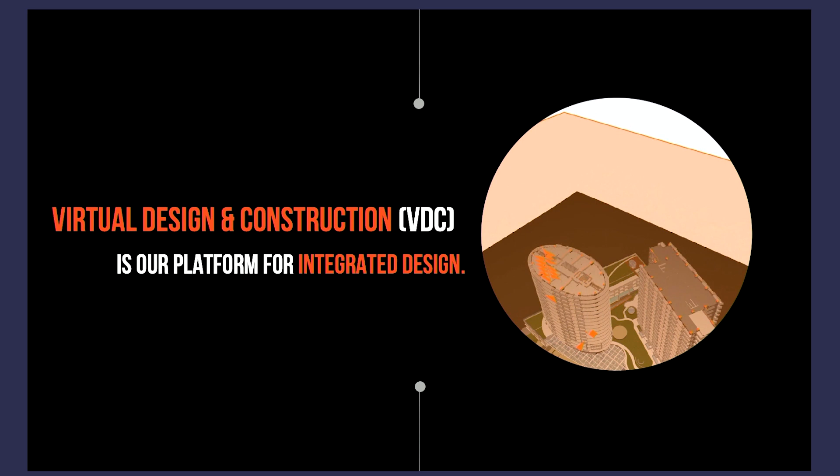And when we started the firm 25 years ago, we always saw ourselves not just as a design practice, but also as a technology provider. And that has been our ethos from the start up to now. And when we started our business, we also were big in integration. So what do we mean by integration during that time? We were looking at integrating our 4 design disciplines: architecture, interior design, master planning, and graphic design.

Now, what we also realize is integration happens with technology. So one of the things we do a lot now, since the time that we adopted BIM, is to not only integrate design, but also include technology. And VDC or BIM has been our platform. And a big part of our story is our partnership with ArchiCAD, which goes back 15 years ago when we were a small firm. We started with ArchiCAD 9.

So that was a time then there was still PlotMaker. For those who are old enough, before there was a separate software for plotting and for modeling. And eventually in 10, they merged it. So we started at that time. And our firm started in 1995. We started with less than 10 people in a small office in a place called Makati in the Philippines.

And this was a time when Asia was booming. So because of that boom, we started our practice, and we kept on winning work. The Asian crisis happened. Instead of decreasing our numbers, we continued to grow as a business. I guess clients liked the way we delivered work. So we were continuously growing from 1995 to about 2005.

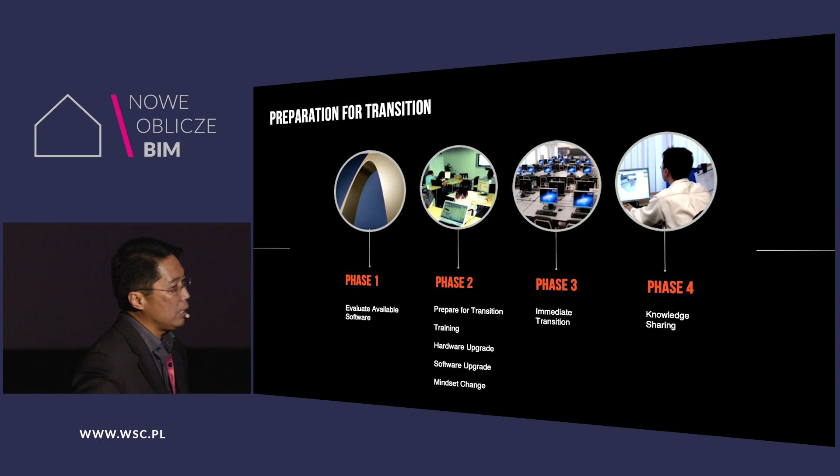Number 1, the question of BIM manager. Our BIM management system was just a copy of our structure when we were in 2D. We had one BIM manager for the whole office, and obviously that didn't work. We were transitioning, we were still in the learning curve, and we addressed that by assigning more BIM managers.

In our office, during that time, we had 4 design studios. All of those 4 have their own BIM managers. Now we have 7. Those 7 studios still have a BIM manager each. These BIM managers are architects doing projects who do BIM management work concurrently, and that solved our day-to-day issues on BIM.

Second is, believe it or not, we started BIM without a BIM manual. And that's where the inconsistency happened, because people were modeling in the way they know best, and it's not consistent across the organization. So the creation of a BIM manual was a top priority for the organization. It took us almost a year to finalize.

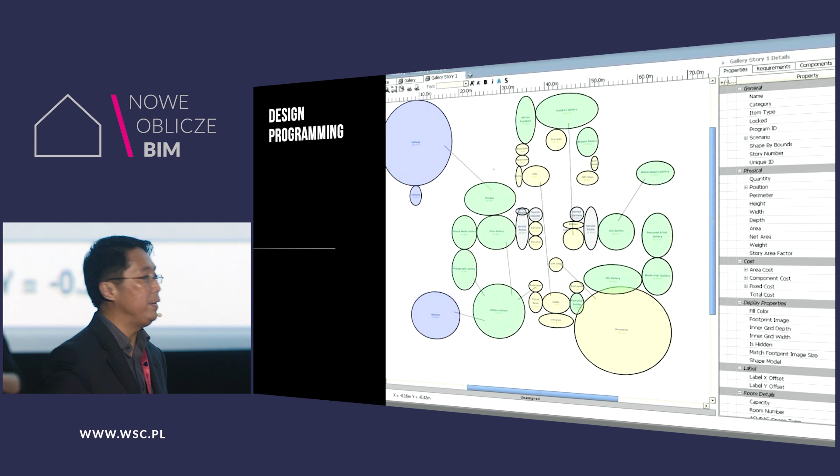Okay, what were the VDC competencies we created in the first 5 years of BIM in the office? Our workflow is such that programming was already done in a BIM-related software. We used a software called Affinity before, and now we're transitioning to dRofus. Same function, it's just that dRofus is more robust when it comes to programming, and as we do complicated work, we think that that is a better fit. Our energy modeling and analysis are done using BIM, using the very early BIM models.

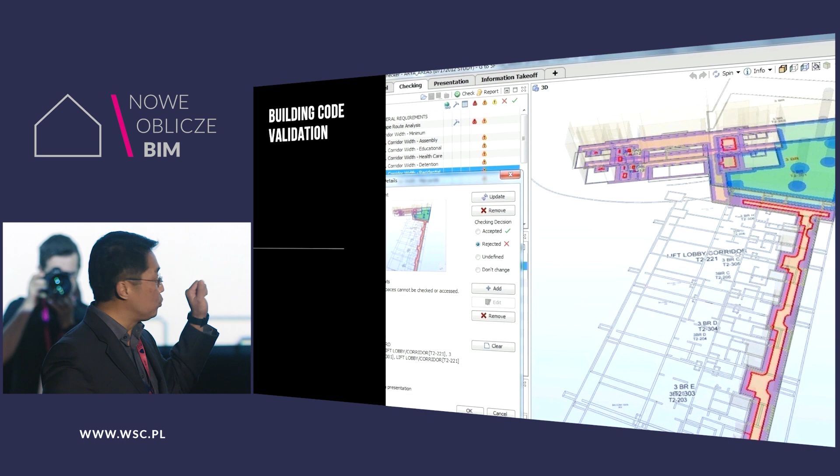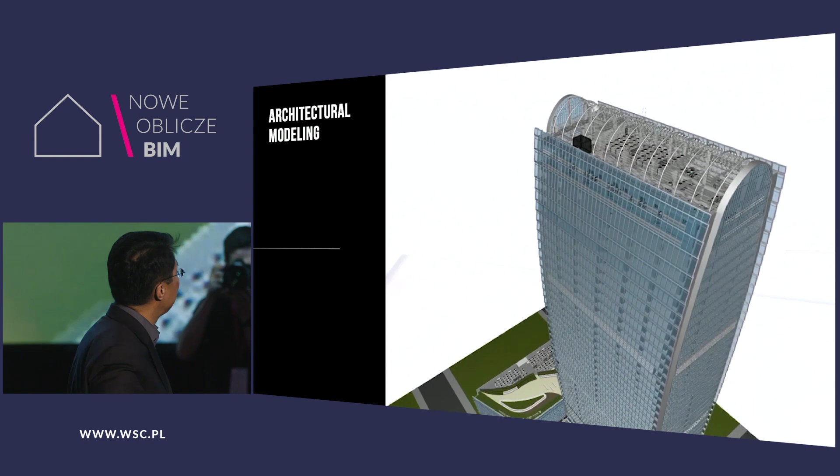Solibri has become a big part of our workflow. It checks code compliance. We wrote the rule sets that check codes in our country. Everything is done in the model. This is an example of a project that we've done in the Philippines. High-rise, all done in ArchiCAD. We went as far as going through structural modeling.

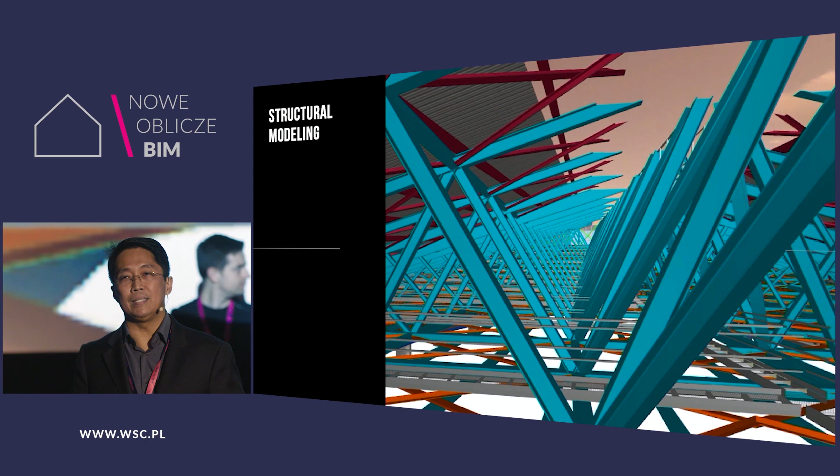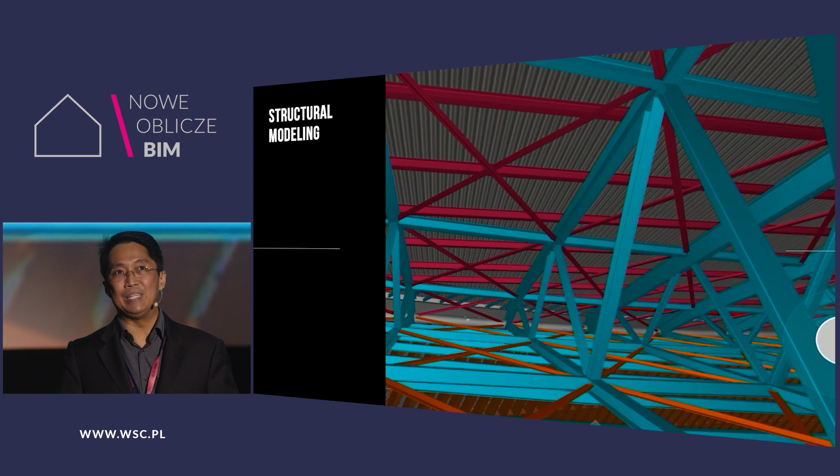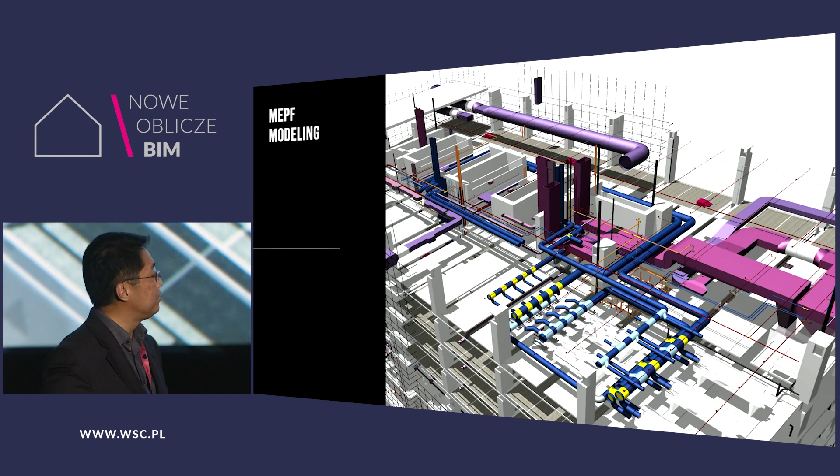There are clients, especially those who ask us to do resorts, who want to make sure that everything is not only properly coordinated, but also they want to get quantities out of the model. And it's because of the logistics reason. It's expensive to bring materials in an island project. So we take it as far as structural modeling, MEPF modeling, which became a standard deliverable in the office. So some of the work we've done, and the normal clash detection, all done in Solibri.

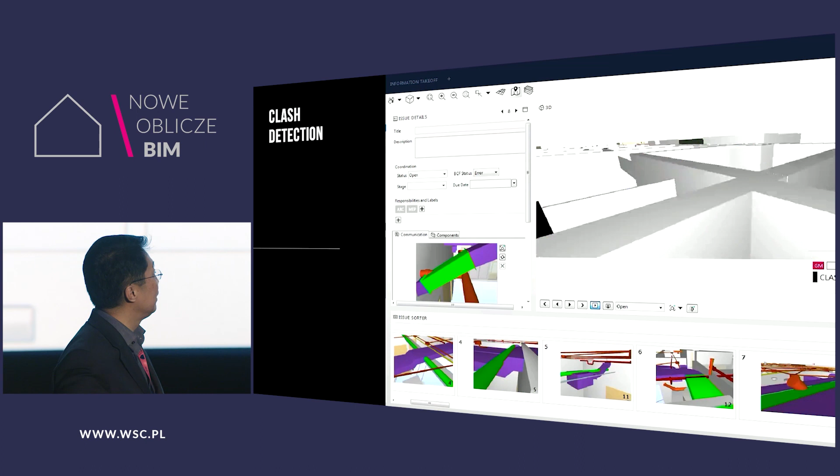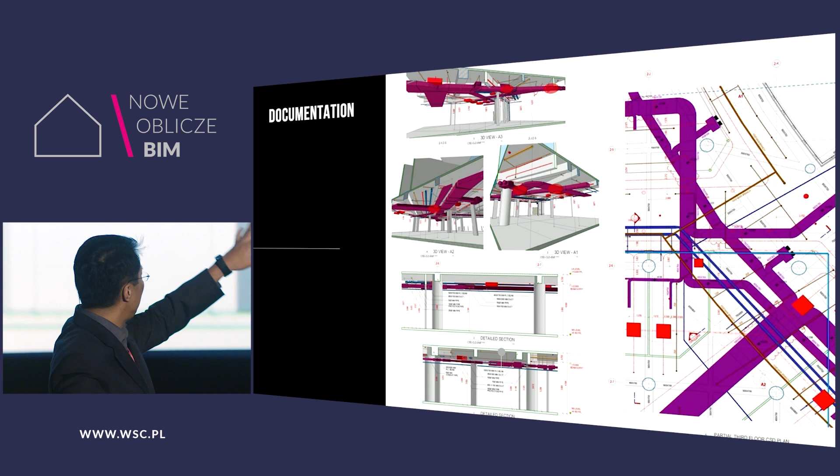Okay, and when we do our documentation work, our deliverable is still 2D. But the difference is we are now able to show 3D information, even in printed form, together with plans and elevations. These are all dynamically linked to the BIM, and we tested this technique in many of our job sites, and contractors like it better because many of their workers understand 3D more than 2D information.

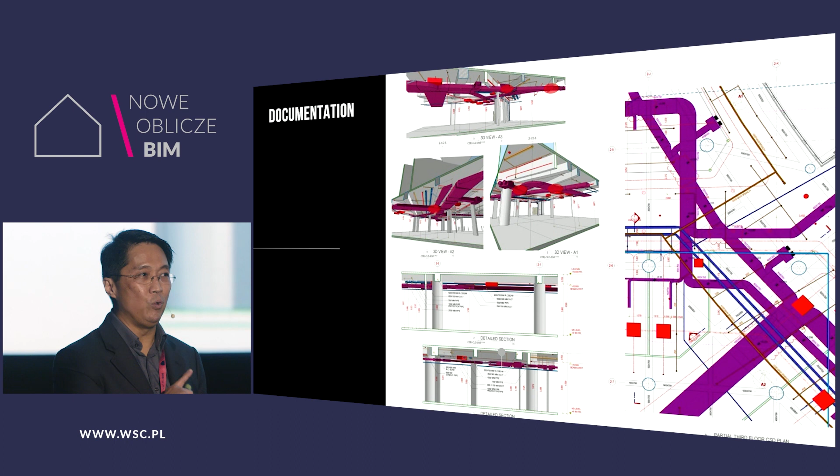If you need to change, change the model. Our rule is nobody changes on paper. You change the model and everything is updated in 2D. So, in 2011, when we felt that we were stable in modeling, we said, what is the next step? We want to create more out of the BIM model. And this is a time that we said, why don't we provide more services for our client, more than just a design service?

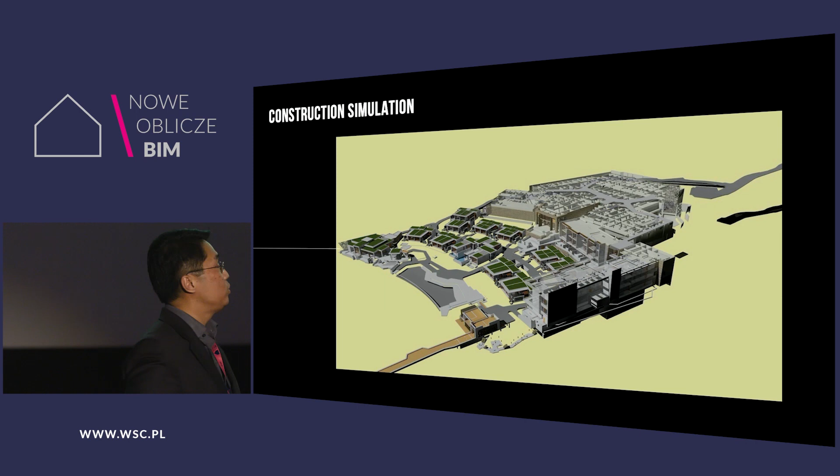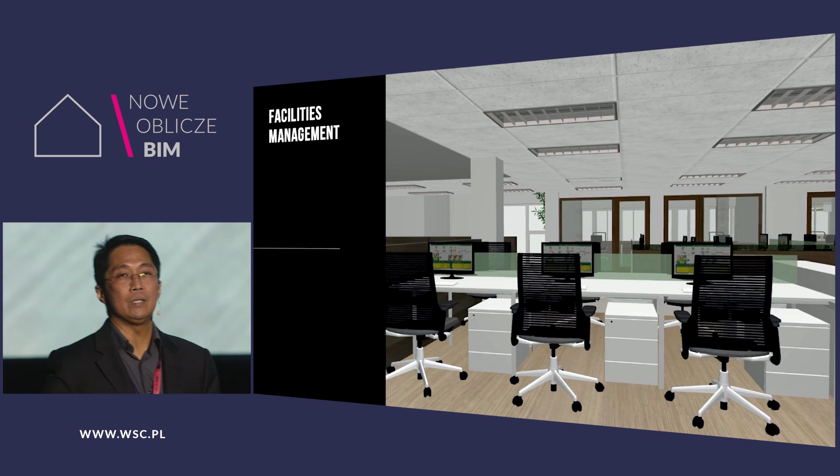And so part of our service expansion is to work with contractors and construction managers on creating construction simulation models, doing as-builts, using laser scanners that become a base for our adaptive reuse work. These are some of the examples. This is a project in Scandinavia that we've created from point cloud to BIM. And we started working with facilities managers to see how we could use the BIM for facilities management and asset management work.

Okay. So that's done. Stable again. The next question for us is, what's the next step? And in 2014, we made another strategic decision, and we said, why don't we start writing add-ons for our use? Because what we realized is at least 65% of our fees are burned on repetitive work, on production work, things that can possibly be automated.

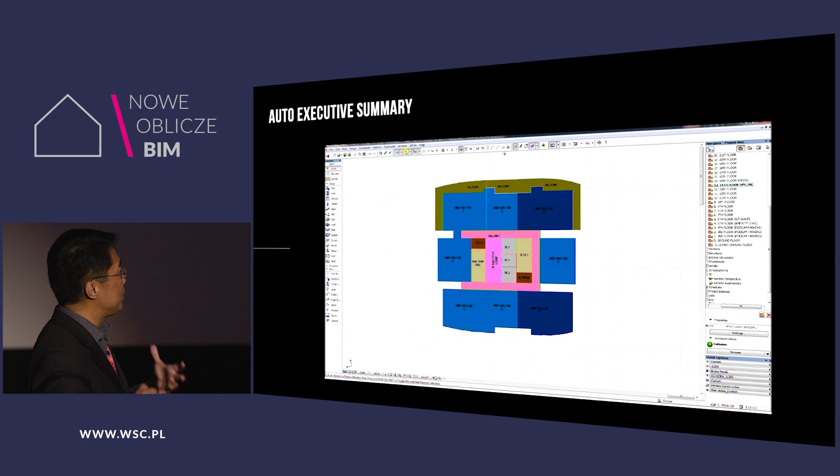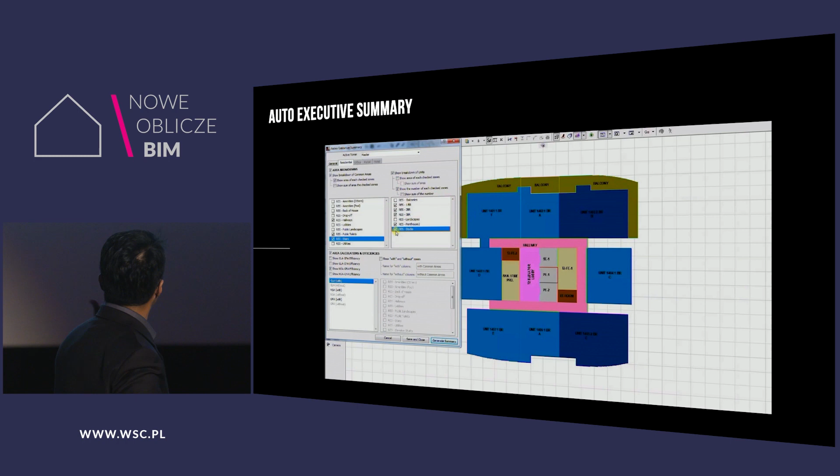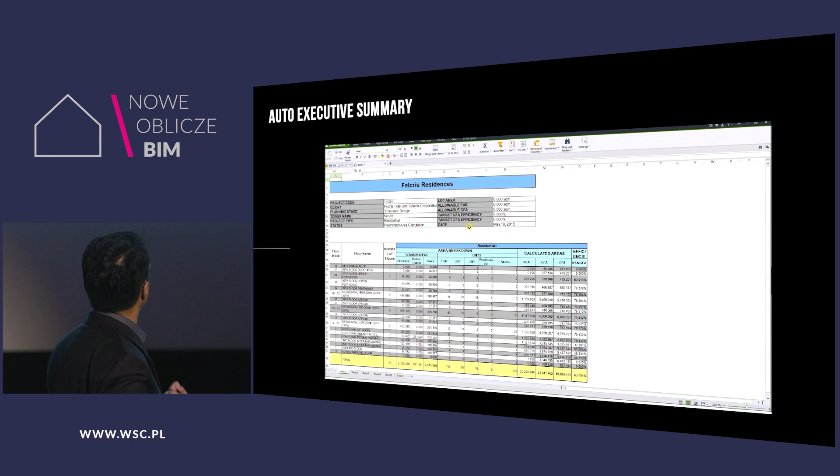So what we did as a company is we decided to create a software writing division. We got software programmers who are not architects, trained them for a year to think like architects, and asked them to write software for our own use. The earlier software we used is for the thing architects hate doing, but we need to do: creating summaries of areas, planning ratios. This used to take us a couple of days after designing. Now we do it on the fly, with what we call the auto executive summary. So there you go. And it requires a different way of modeling.

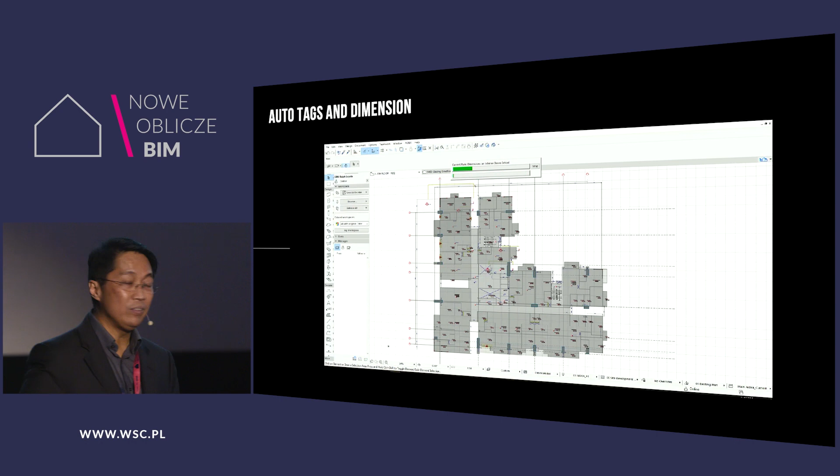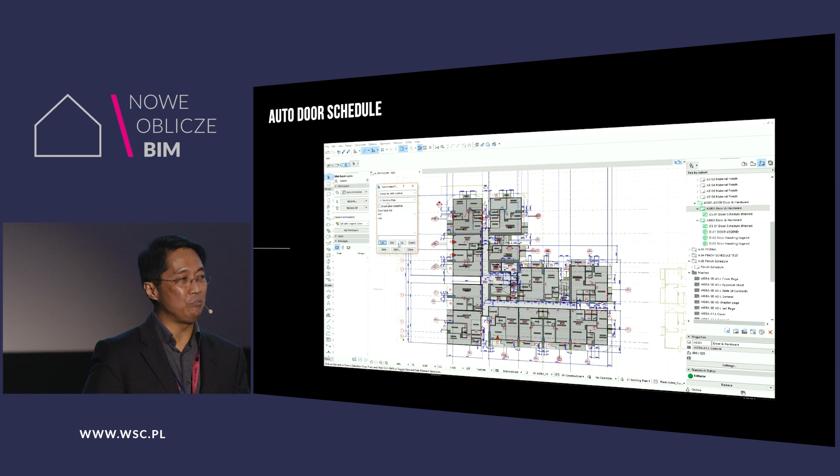We also created tools that automatically dimension and tag our drawings. We call it the auto tags and dimension add-on. And this is all done in ArchiCAD, in the API of ArchiCAD. Then we said, why don't we automate the door schedule? So our team created and set workflows that automatically generate door schedules for a whole project. These are mostly high-rise projects that we do, so a lot of time was saved automating this process.

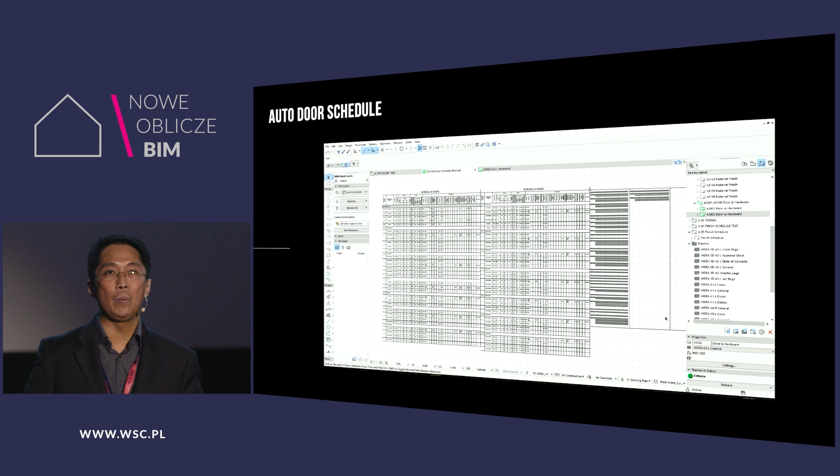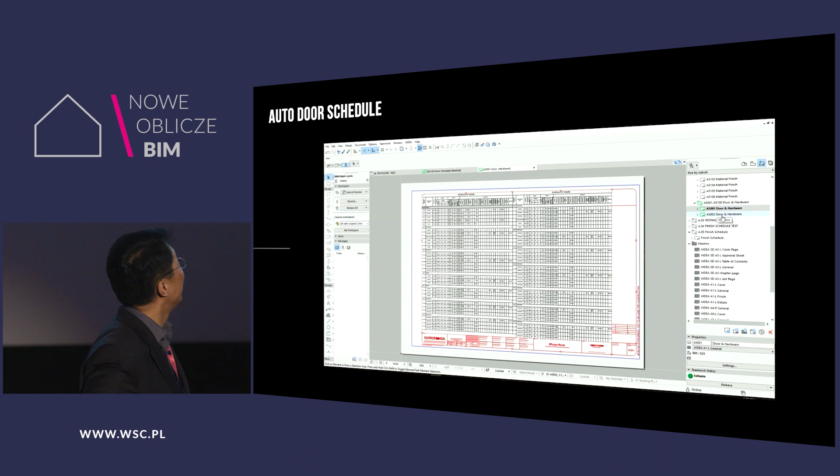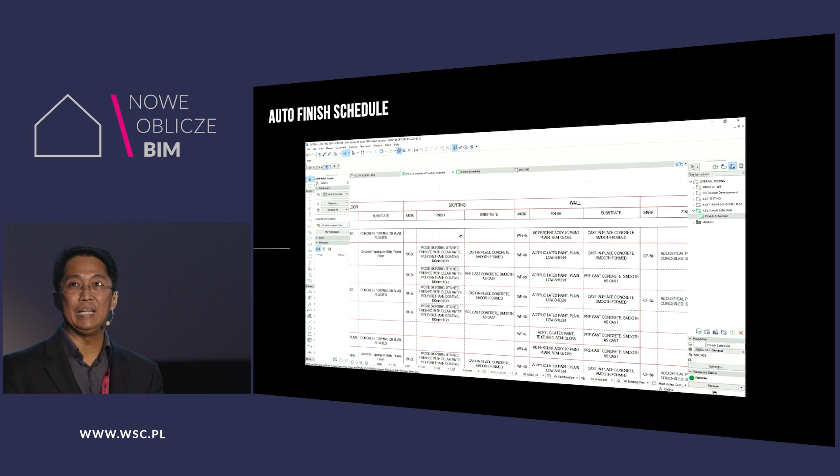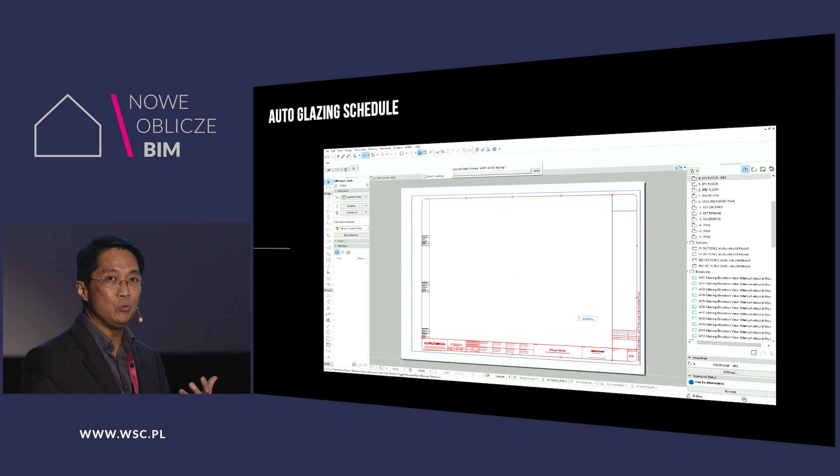And that is also the reason why auditing is important, because we need to create models correctly so that we get correct information. So that concept of door auditing was also applied in finishes schedules. It automatically sets itself in the sheet. And again, as long as the modeling is correct, the output is correct. And the same with windows, glazing, curtain wall. It creates its own schedule based on the format that we use in our country. And the same with bill of quantities.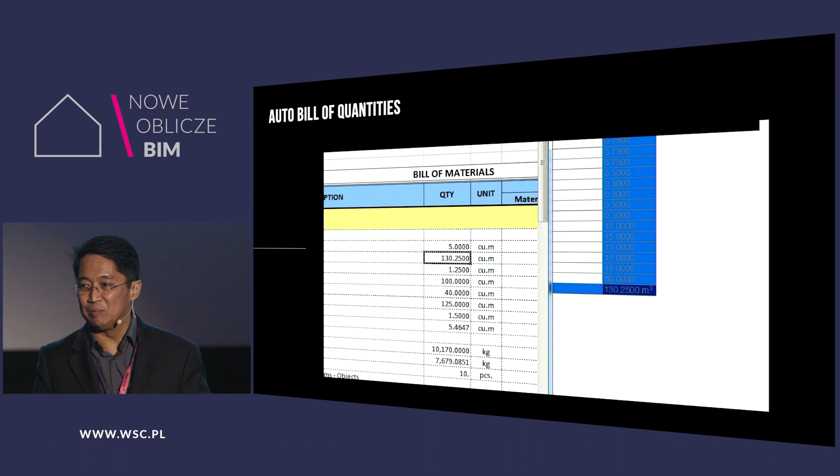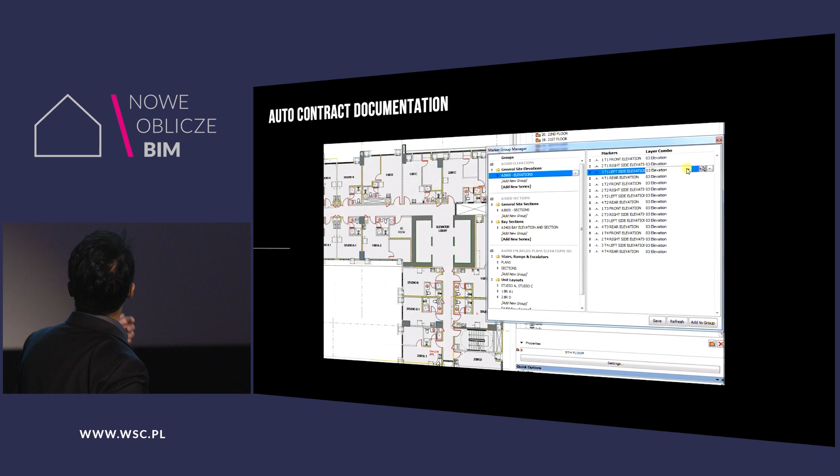One of the things we also learned as designers is we have to provide the cost dimension of a project. In many projects, clients fall in love and then they find out that they cannot afford the cost. So we go back and redesign. What we do now is put costs in front of the process through add-ons that derive costs and quantities out of the project. And the culmination of all of that is what we call the auto contract documentation package.

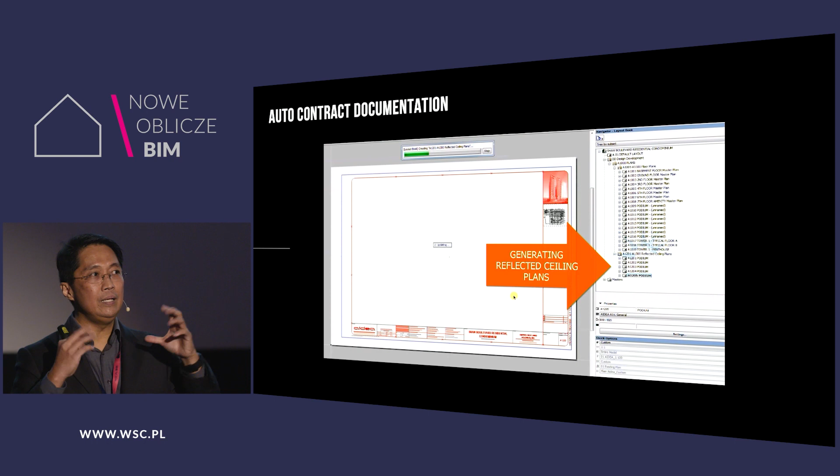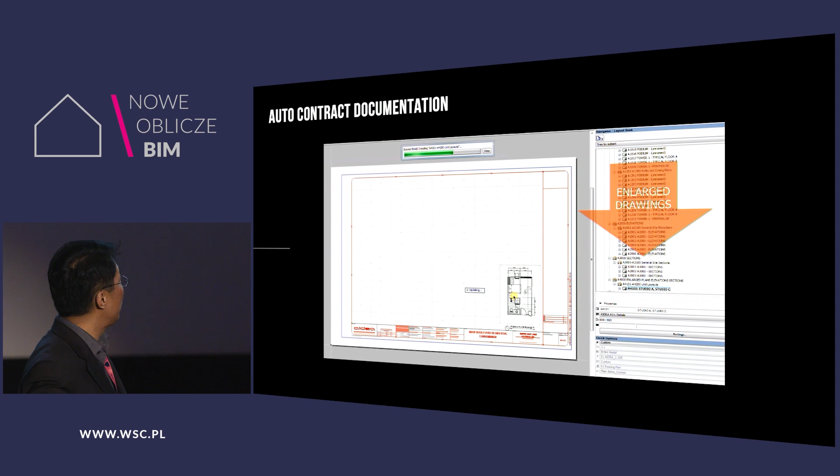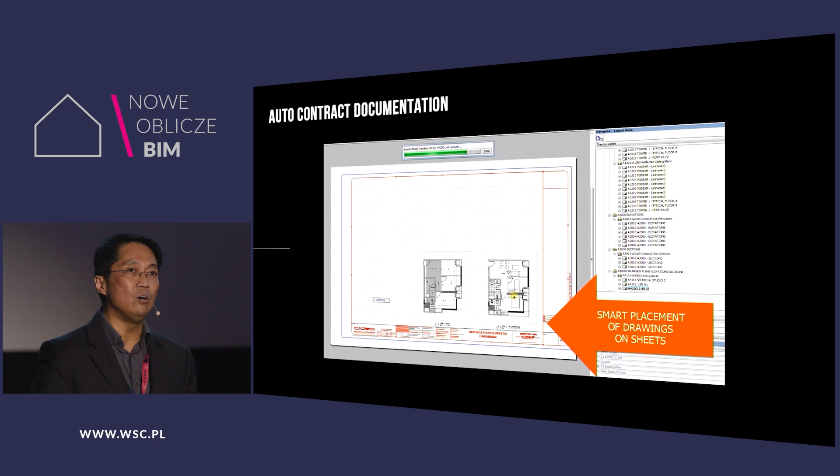So our strategy is to create a very detailed model and let the system take over and create the working drawings of the whole project. What used to be a 5-month job for a high-rise is practically reduced to less than 2 weeks. So this is the kind of programming that we created in-house.

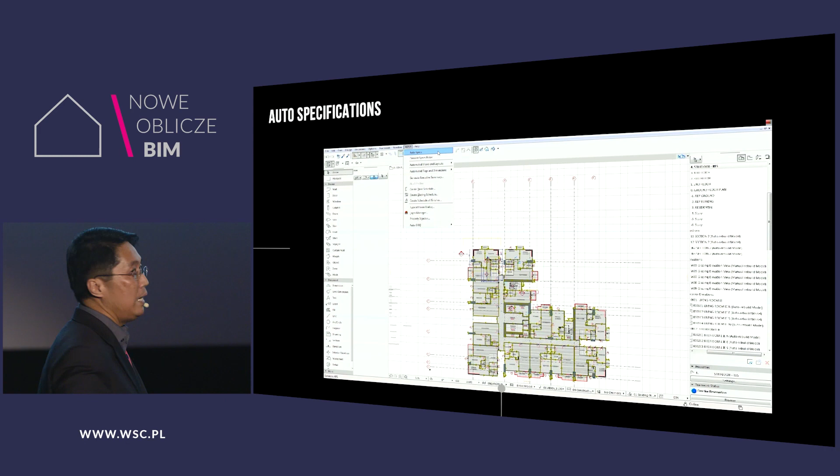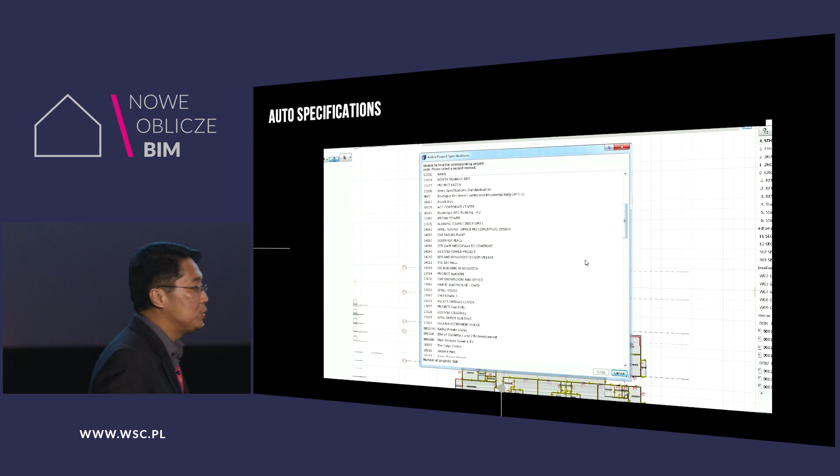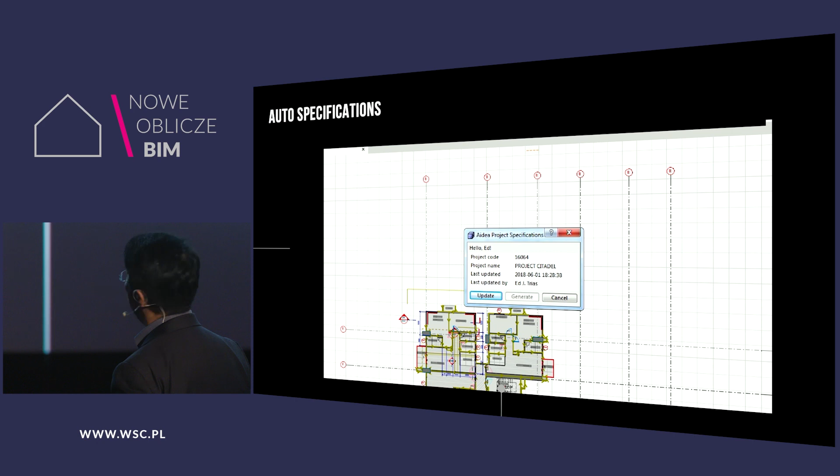And lastly, we said, how about specifications? Can we link that to the BIM? And so we created a database of all the materials we use in the project and linked that to BIM objects, so that when you put an object in a BIM model, it automatically generates a specification clause and publishes it at the end of the process.

Okay, so this is a sample. It's creating the database, and this is the sample output. And Philippines is based on US standards, so this follows CSI format.

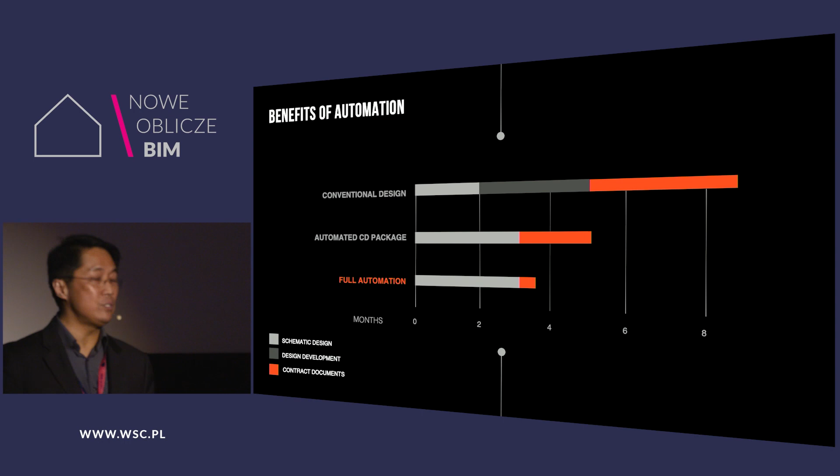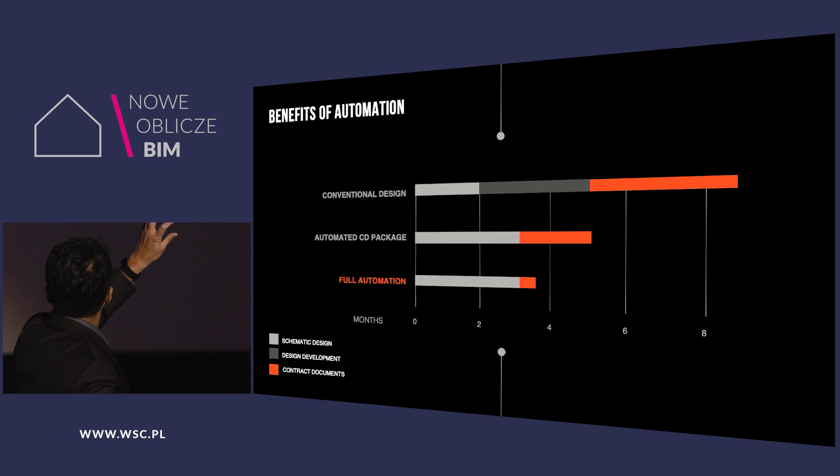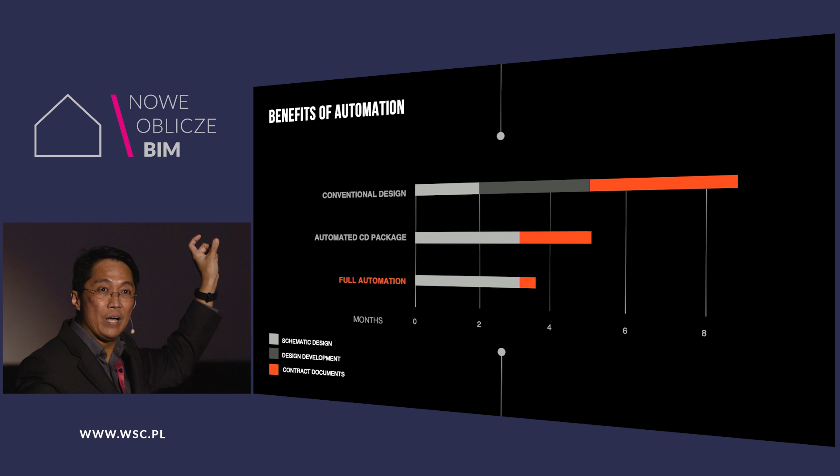So what are we trying to achieve here? We're trying to be efficient first at the back end, where in conventional design, it used to take the longest part of our design process, shortening it using the CD automation package, and our dream, and this will be very soon, is that with full automation, we can shorten the production process and spend more time in design.

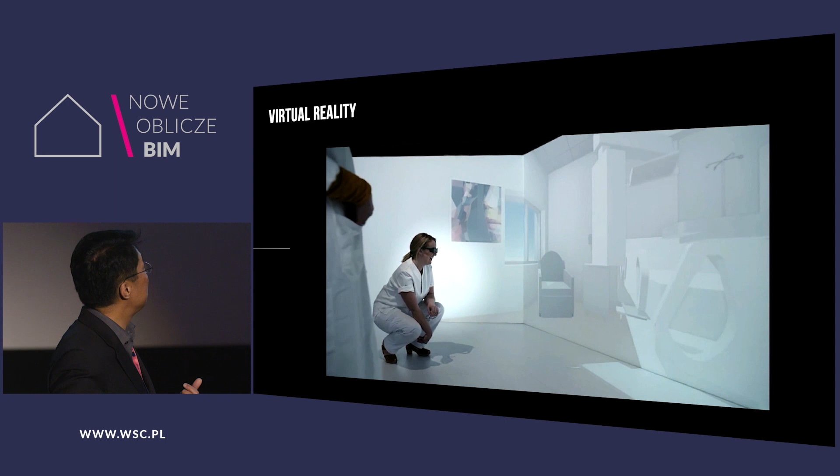In 2016, after we've done most of this automation work, we also looked at virtual reality and co-creation, using the same BIM model so that we can study, analyze projects, bring the projects to site, and project it in one-to-one scale. We use this a lot now with our hospital projects and with hotels, showing mock-ups. And this created, again, a lot of savings for the company.

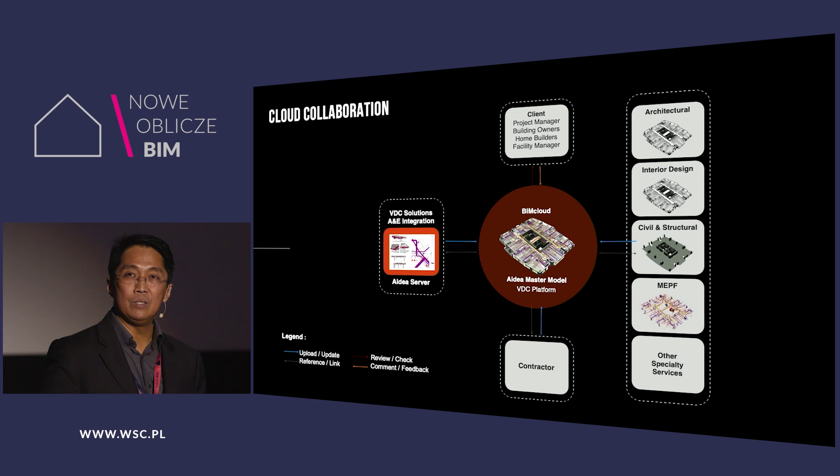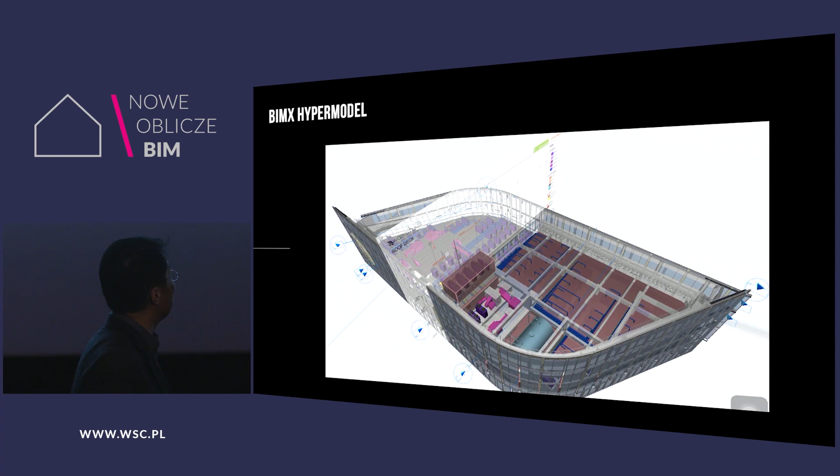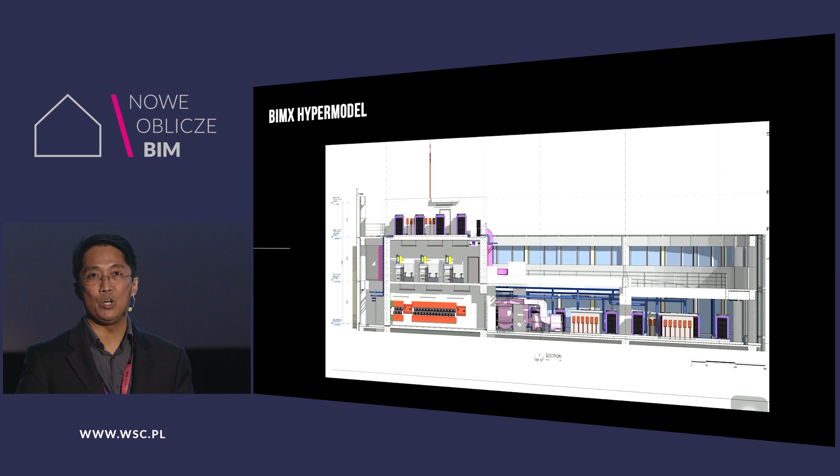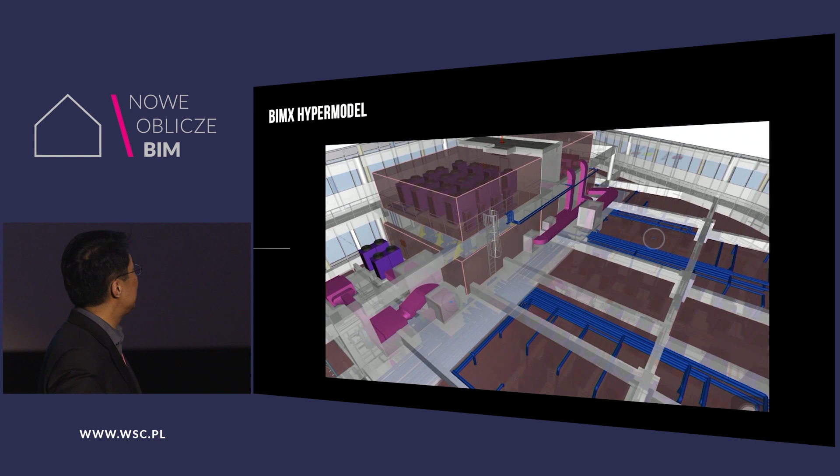And we also do a lot of cloud collaboration using BIM Cloud. And now our collaboration work to anywhere in the world is done through our BIM Cloud system. And also, we use a lot of BIMx applications. Many of our clients like the fact that we can publish our project on all phases using BIMx, so we push that information to them, and the project is available real-time, 24/7. So that is, again, something that was appreciated by the clients.

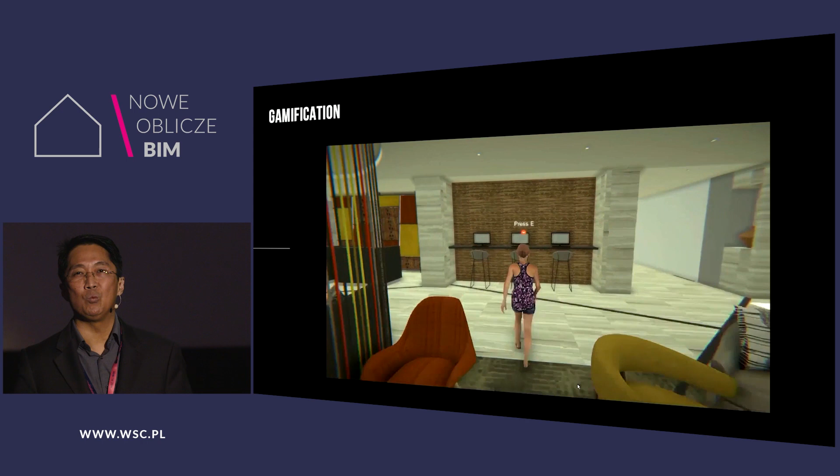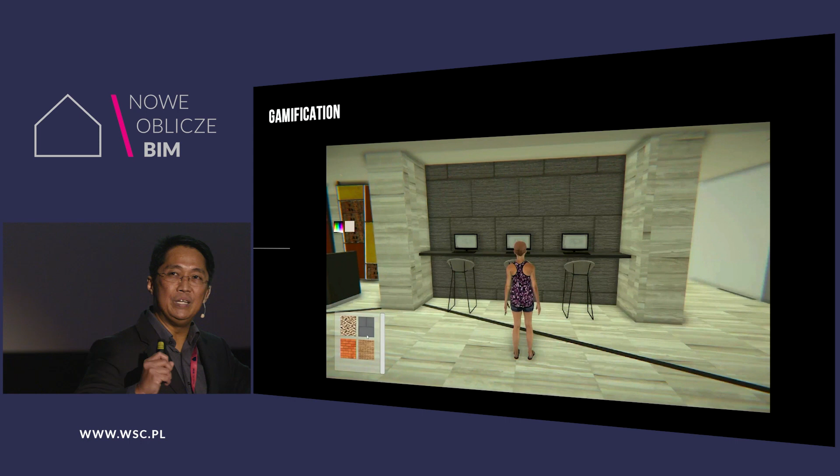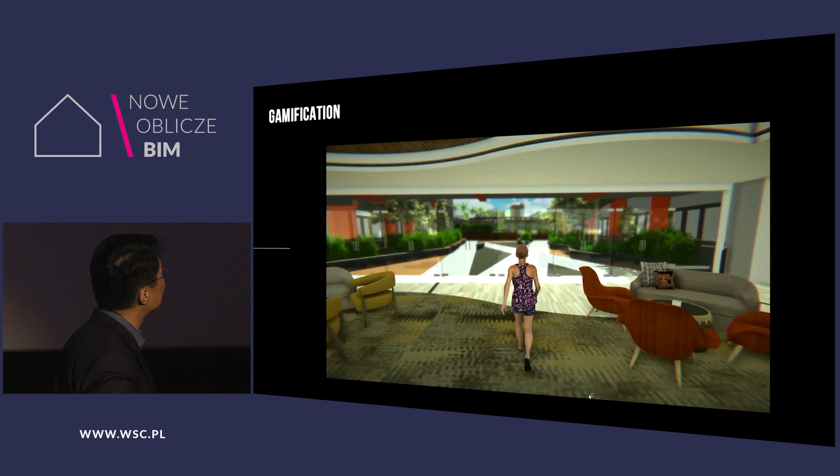And talking about more immersive ways of working, we went into the realm of gaming application, where we use the BIM model, create a gaming platform out of it. So you choose your avatar, look at projects. It's fully user-defined. So this is one of our ways of explaining and presenting our projects in a different way, something that is more immersive and fun.

So many of our clients like this, especially in the concept stage, and we have started to do more of this. This is an early version of those gaming applications. Oops. And also the BIM is linked to our 3D printers.

And in 2019, we also realized that customization is important. Many of our clients would like us to support them and to customize applications. So now we created another company called Aidea Technologies that provides this work where we help them migrate, we help them to integrate, and we help them to customize their work. We're working with clients in the US, in Europe, and firms who would like to accelerate the transition to BIM and to move it to a more advanced level.

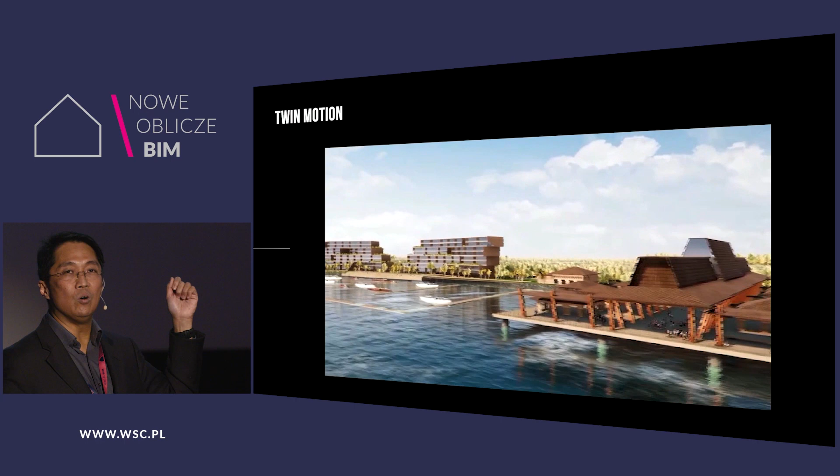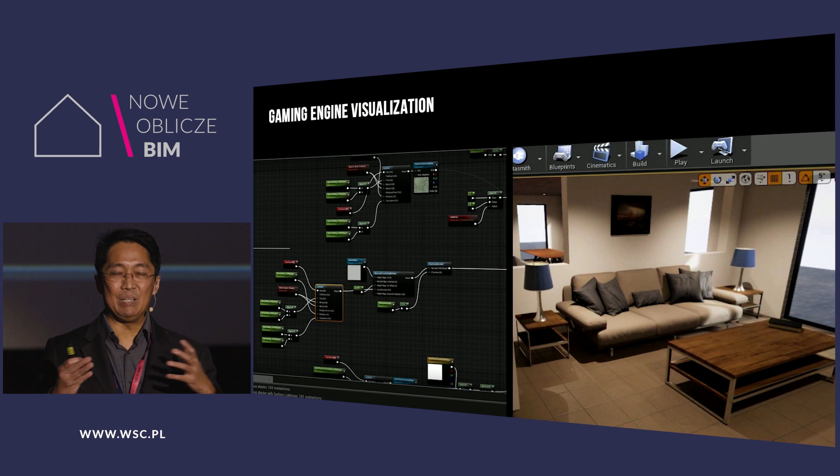Okay, now how do we see the future? What are we planning to develop as we go further? Number one, we're moving all our visualization tools to Twinmotion, something that's more interactive. Work that used to be done in 1 week can be done in a couple of hours, similar to this. We're also moving into the gaming platform where everything is more interactive. Start to also write scripts.

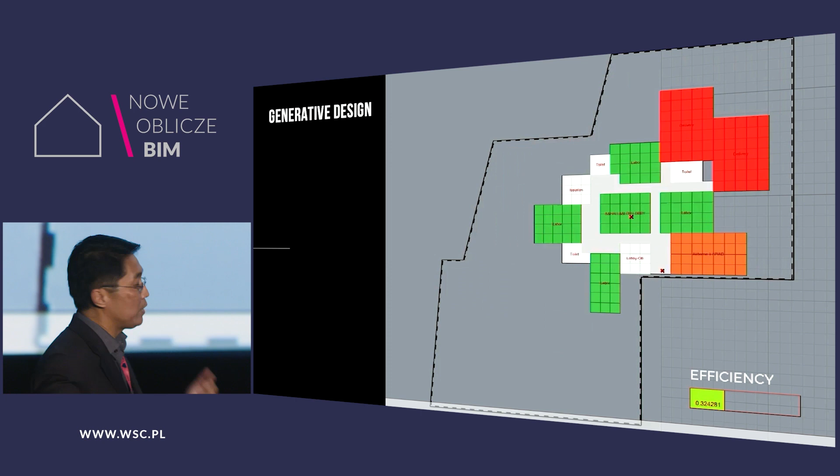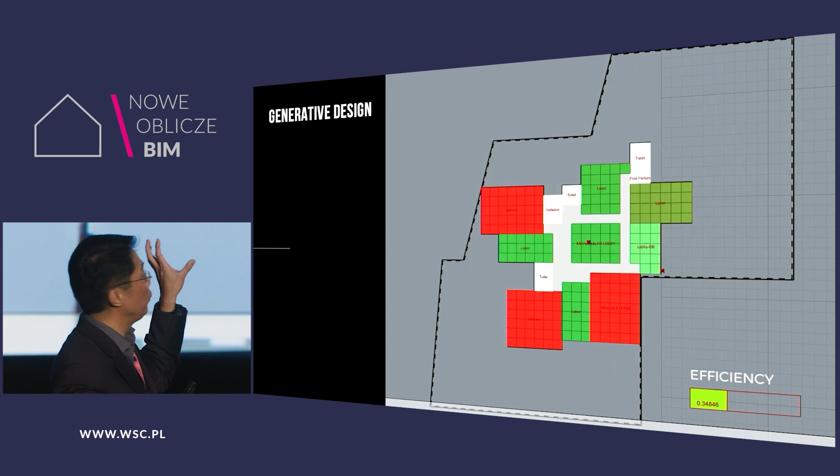Also, generative design is one of our agenda. We started to look at this and to see how we can create software or add-ons, applications that will help us start design faster, give us options. Machine learning is important, and also applying the BIM through IoT and using data.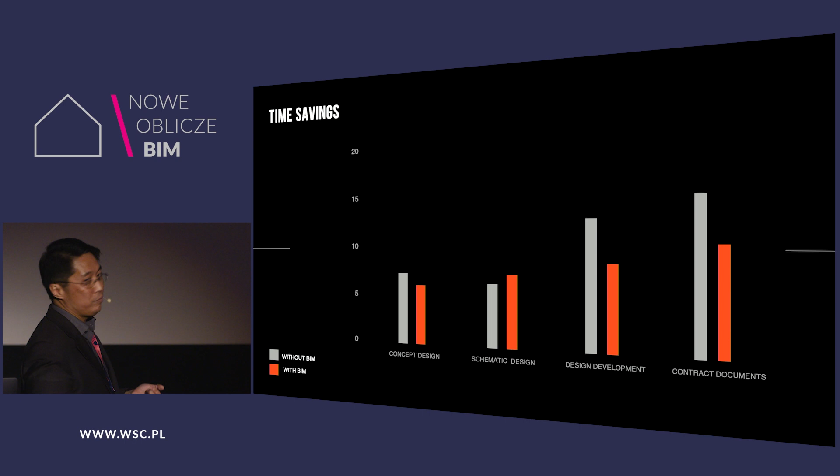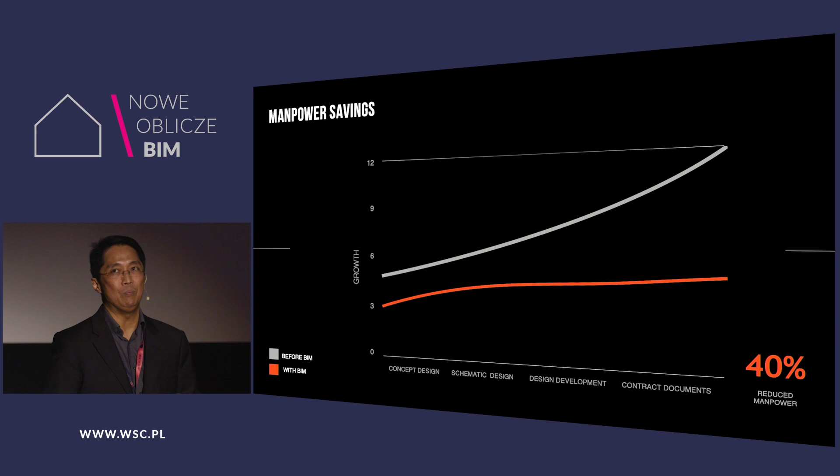So what does all of this mean for the business for us? Well, in terms of time, we saved a lot of time, which means money, and which means more opportunities for the business. When you look at the way we grew our business, our workload and manpower, the curve isn't quite the same. We were taking more work, but our staff growth is relatively lesser. We estimate that if we were to do everything in all 2D, we would need about 40% more people at least to do the work that we currently have.

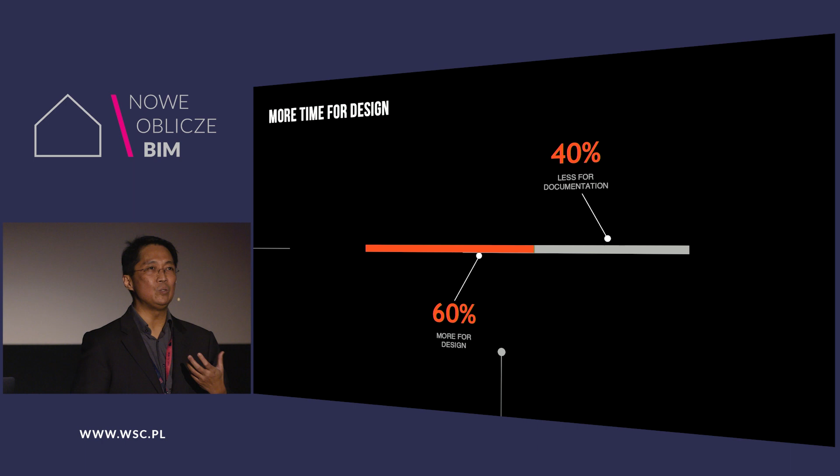And the idea for us is to automate as much as we can so that we can devote more time in design and less time in post-design work. In 15 years of doing BIM, we listed our top 10 learnings, and I'd like to share those with you.

Number one, we hire learners and not experts. To work in our office, you need to be a good architect and a good designer, and you have to be open-minded. We do not hire people because they are experts in BIM. We teach them how to do BIM properly. They learn by doing. Not all of what they should learn is done through training. We have a 50-50 ratio where 50% is learned through training and 50% is learned through working with people who know how to use BIM on a real project.

Kick-off is very important. Some call this a BIM execution plan. But if you have a wrong kick-off, then the rest of the BIM process might be at risk. So to us, we spend a lot of time kicking off a project.

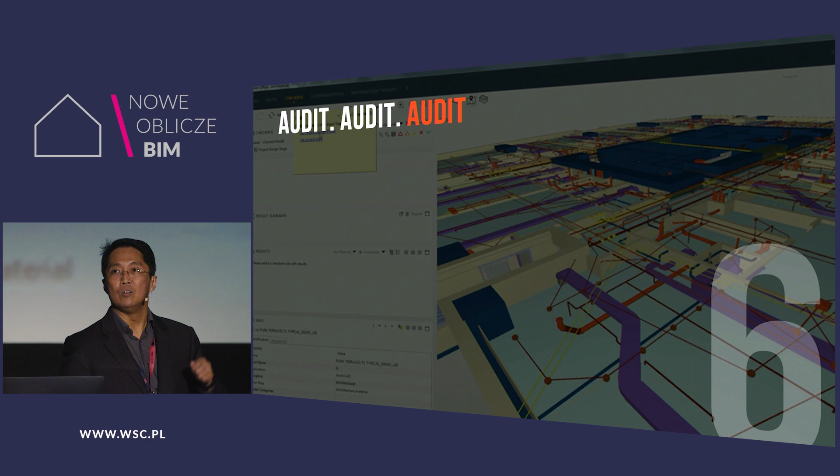As you mentioned, there is no one software that does all. So learn how to integrate software and solutions so that you can use, capitalize and maximize the use of each software. Audit is important. I mentioned earlier, audit is a big part of our workflow. You have to make sure that you have enough checks in place.

Mistakes aren't failures. We made a lot of mistakes in our BIM transition. Probably made all of the mistakes that people have created. But we see that as a learning opportunity. And we also wasted a lot of money on software that ultimately didn't work for us. And that's fine. We've already accepted the fact that not everything works for us.

Co-create with partners. Look for partners who can level up your game. It's the same with sports. If you work with the pros and you play with the pros, you can be better, right? So we always look for people who we can collaborate with and who are better than us.

Vision is important. People have to understand why you're doing this. Moving to BIM and making it work has a lot to do with winning hearts and minds of people. And so if they're clear with the vision, they will support it. Your kitchen or your workplace is also very important. Make sure that you're creating a workspace that is conducive to innovation.

And more importantly, BIM transition starts from the top. It is not just the concern of technical people, of the IT, it is more of a concern of top management. BIM transition will only succeed if it has support from the top level of management. I've seen people who approach me and said, our managers cannot understand, they're not supportive, and that's why our BIM transition is not successful.

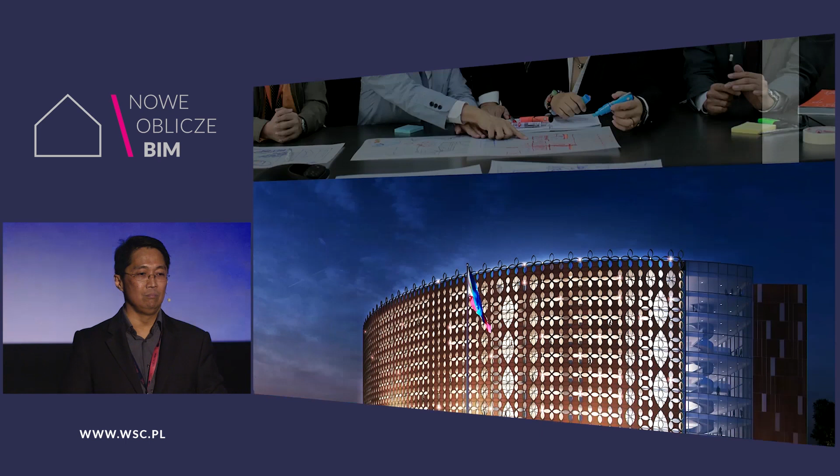So you might ask, having BIM, do we still draw? Do we still draw by hand? Do we still sketch the old-fashioned way? Do we still do visioning exercises? We do. And we do that more now. And I'll give you an example of a project where we combine BIM, storytelling, and all of the different things that make a project interesting. This is our entry to the Philippine Senate design.

We're designing something that could possibly be the home of the Senate for the next 100 years. Since this is an institution that represents us as a nation, it should also embody the uniqueness of the Filipino. We ran a survey nationwide to engage the people to co-create the new home of the Senate. We were surprised with the responses we got.

The Senate is supposed to be a chamber imbued with gravitas and a national perspective. We would like to have a sense of security in the design. It should be capable of embracing the people.

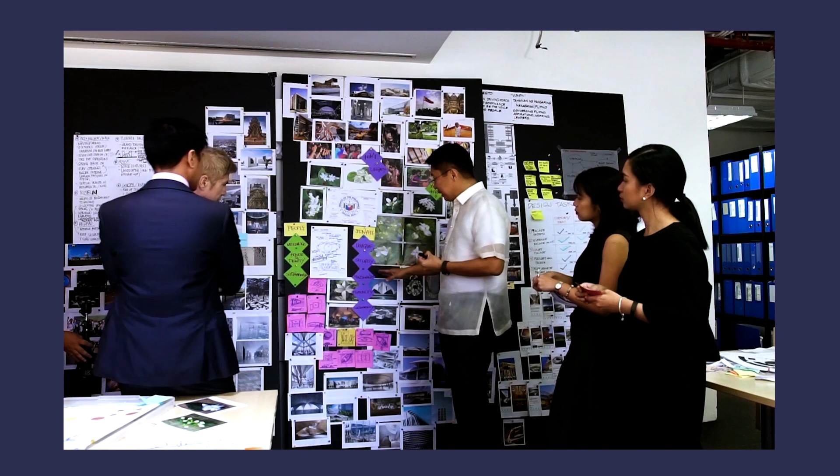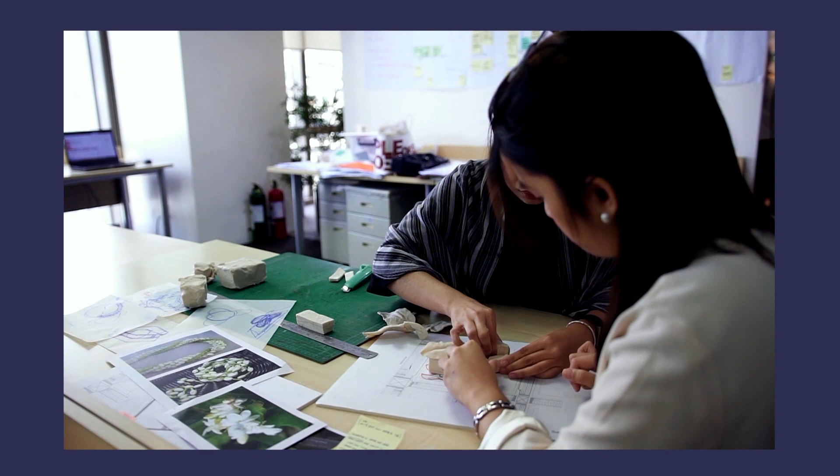They want the new home of the Senate to be welcoming, to represent honor and dignity, that will leave a better environment for future generations. The next step for us is to think of a metaphor. What will best represent welcoming, honor and dignity, and sustainability in a form that is uniquely Filipino?

If you look at the seal of the Senate, the braids there, the flower, represents sampaguita, and that represents honor and dignity. The most elegant way of translating sampaguita to art is through the weave. I have my favorite barong embroiderer. I realized that they could be co-creators. So we invited them from Laguna. They stayed and worked closely with our designers and developed patterns and symbolism that best represent the braided sampaguita.

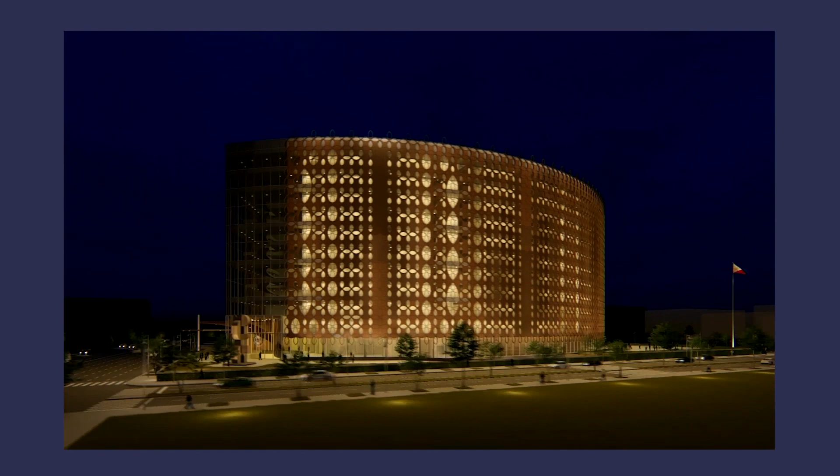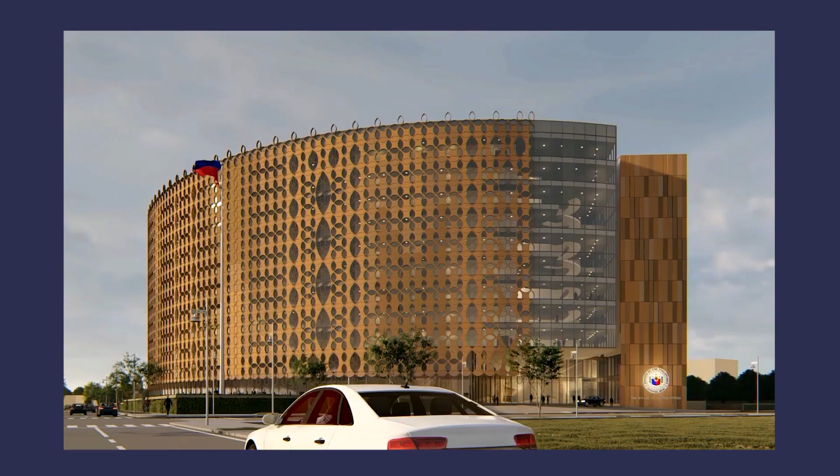We mapped that in our basic building mass and projected it in virtual reality. We were able to create both the formal and informal side. The form of the building, which you can see, is a bud of the sampaguita. Our design has considered a very smart way of phasing the project so that we save more than 1.5 billion pesos in capital expense. The mechanical systems that we are introducing consider not only the capital expense side, but also how we will operate the building in the next 100 years, because that has a bigger impact on sustainability.

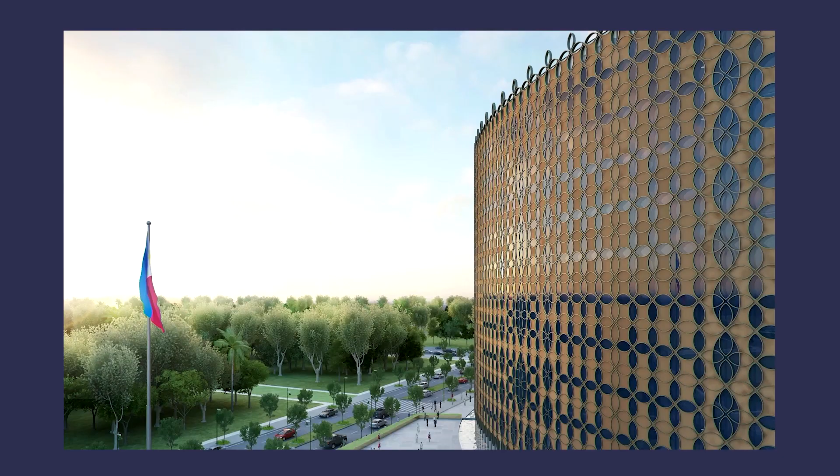There's a message that we'd like the architecture to convey. Like the braids of the sampaguita, we have to work as a nation. Each one, the senators, the people, working hand in hand, being bound by one string, and that string is our aspiration for a better country.